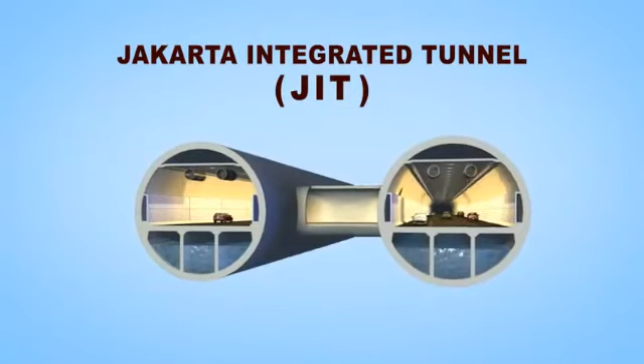Jakarta Integrated Tunnel, a twin or double-barrel tunneling system, presented by PT Antaredja Mulia Jaya and supported by the Ministry of Public Works and Housing in cooperation with the provincial government of DKI Jakarta.

Jakarta is the capital city of the Republic of Indonesia with a population of around 10.2 million people in 2011. But the Jakarta metropolitan area, or Jabodetabek, has around 28 million people, which is the biggest in Southeast Asia or the second biggest population in the world.

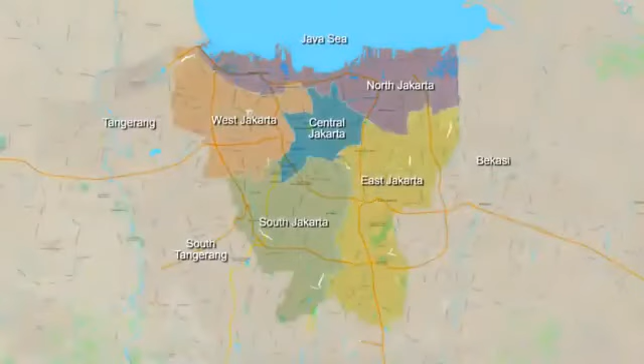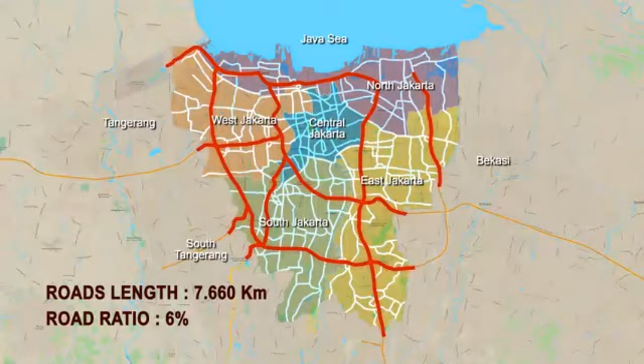Jakarta has only 7,660 kilometers length of roads, covering road areas of around 4,000 hectares. The ratio of roads in Jakarta is only around 6% of the city area. The total amount of motor vehicles in Jakarta was around 9.6 million in August 2014.

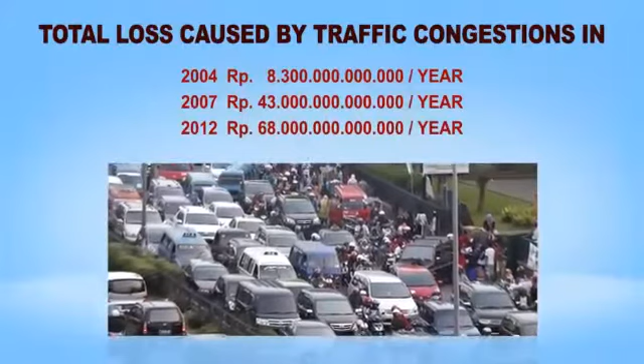These motor vehicles are always increasing rapidly year by year and cause severe traffic congestion in almost the entire city area. The classical problems of Jakarta city are traffic congestion and flooding.

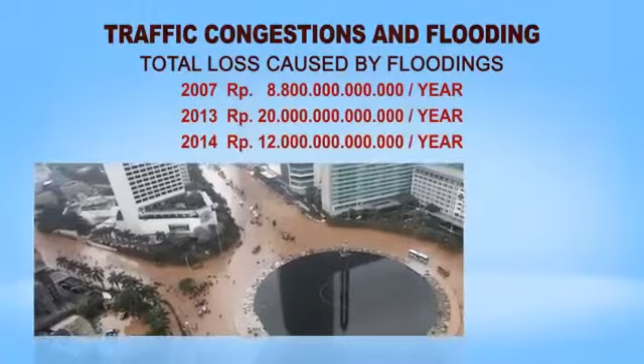The basic concept of flooding management in Jakarta was given by Professor Herman van Breen in 1918 when Jakarta was called Batavia under the Dutch colony. In this concept, Batavia city was entrenched by a flooding channel.

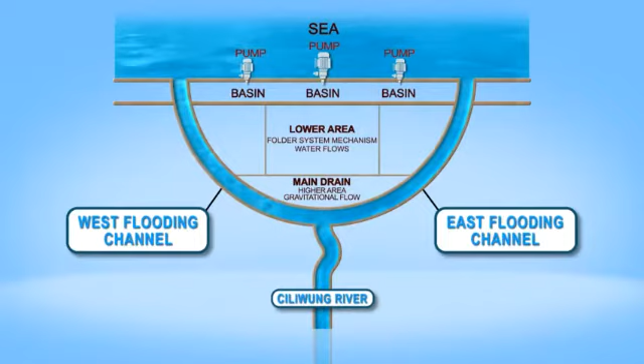In principle, this concept is to limit or restrict rainfall water coming to the city from the upstream area by building a half-circular flooding channel. Whereas since the volume of rainfall in the city has become less, it can be managed by building several drainage channels inside the city.

The Dutch built half of the flooding channel to cover surface water flow from the southwest area of the city. This channel is well known as Kanal Banjir Barat or West Flooding Channel. Just a few years ago, the provincial government of DKI Jakarta completed this flooding channel by building the other half of the channel in the east direction, that is the East Flooding Channel.

However, now a new problem has arisen. The old Batavia has changed and become a bigger city called Jakarta. The flooding channel is not bounding around the city anymore, but is now located in the middle of the city. Therefore, a new model of flooding mitigation is urgently needed at the south of this flooding channel.

The best answer to all of those problems is the Jakarta Integrated Tunnel, or JIT. JIT is a solution to traffic congestion and flooding problems, and at the same time, it can give a solution to the lack of electricity and standard clean water supplies of the city as well.

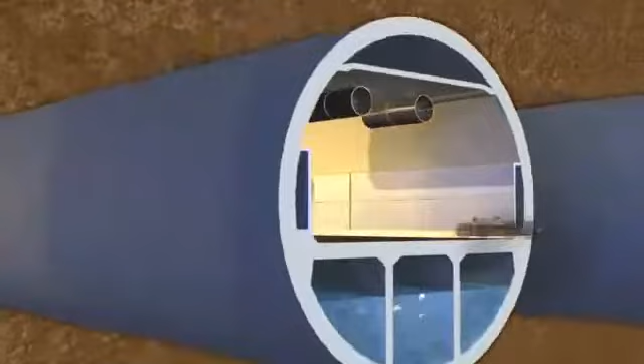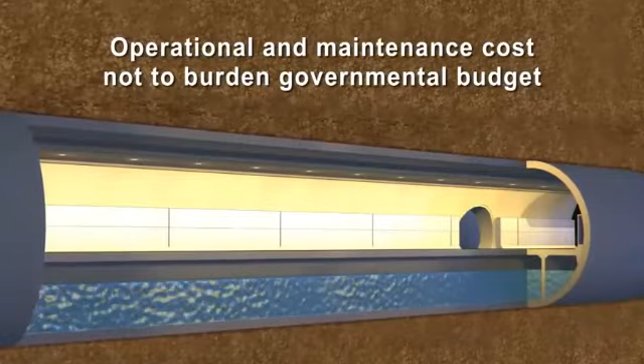Actually, it is an obligation for all governments in the world to build and finance flood controlling facilities, because not even a single private company will step into such a zero return project. In order to overcome this constraint, in the Jakarta Integrated Tunnel concept the flood controlling system is integrated into a toll road system. So, the JIT system relatively will not burden the government budget, especially in operation and maintenance of the project.

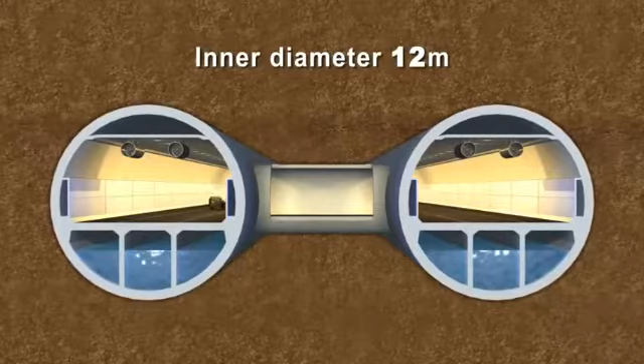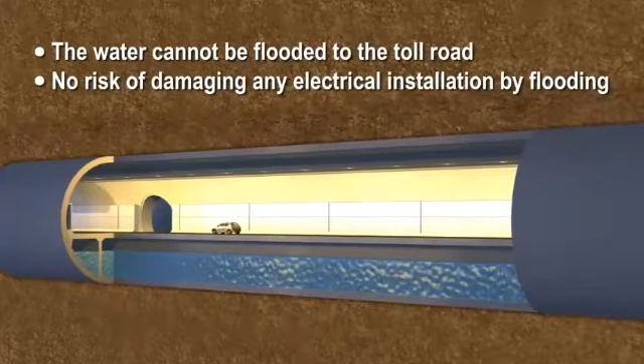Jakarta Integrated Tunnel System is a twin tunnel or double-barrel system of 12 meters inner diameter each. There are 3 lanes of toll roads in each tunnel. In the JIT system, the functions of flood controlling and toll road are totally separated. There is no need to build a water gate inside the tunnel to separate and alternate these two functions, wet and dry condition, as needed in the single tunnel system. Therefore, there is no risk of water flooding the toll road at all.

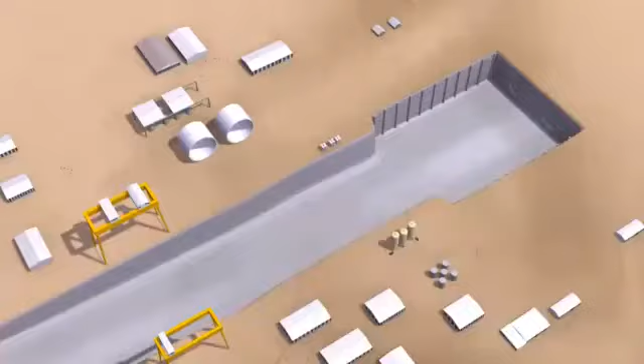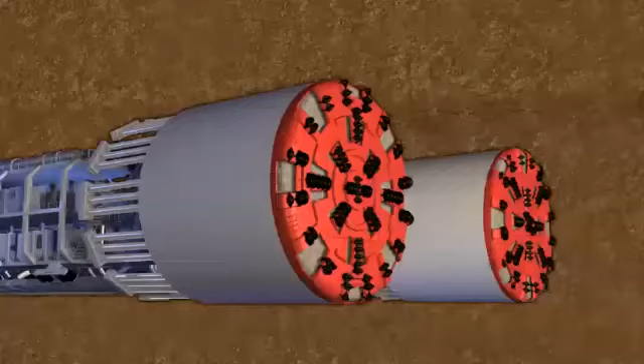Since there is no land acquisition needed, or only limited at both ends of the tunnel, tunnel construction can be done in a very fast and safe way using a tunnel boring machine or TBM. While the machine is moving ahead, it is followed by installing precast concrete segments to form the tunnel linings or tunnel walls.

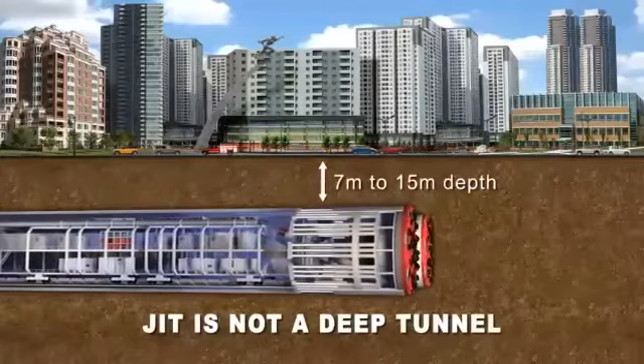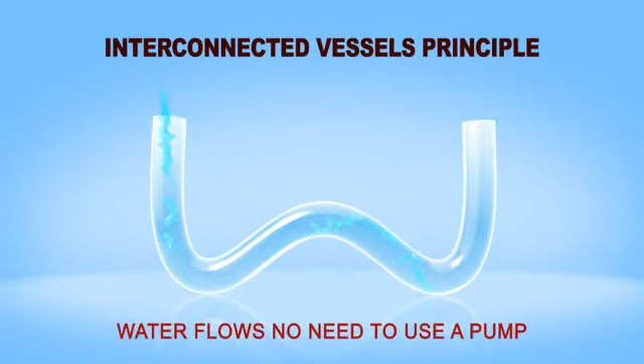The route of Jakarta Integrated Tunnel is chosen under an existing road or under an existing railroad. By doing this, it can assure to avoid long and deep pile foundation of buildings and to get a good compact subgrade formation. During construction stage of TBM, there is no or only limited disturbance to the existing activities on the surface.

So, if water is being poured into one vessel of an interconnected vessel, then the water will flow through the tube into another vessel until the height of the water level in both vessels becomes horizontally even. Water flows inside the tunnel is ruled by a gravitational law, and therefore, there is no need to use a pump, except for the purpose to re-empty the vessels.

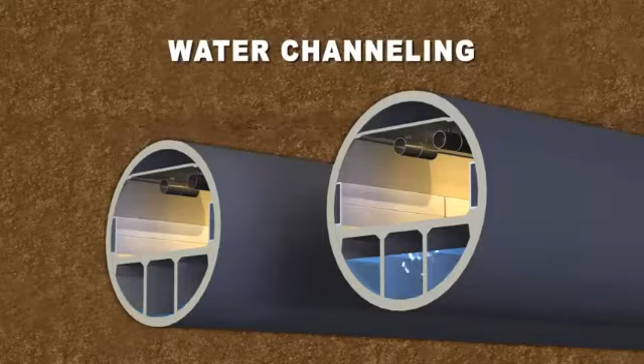Maintenance of wet area of lower channel can be done one by one alternately among each tube of the twin tunnels. When one tube is being emptied, then the other tube is still keeping on function in channeling water. With the continuous functioning of water channeling, the JIT system can also be utilized to build a micro hydroelectrical power system and as a water channel to cater for standard clean water supply to the city.

At the first stage, Jakarta Integrated Tunnel will build JIT-1, Balekambang Manggarai Corridor, with a total length of 12 kilometers. This tunnel is to mitigate flooding caused by overflow of Ciliwung River and to reduce traffic congestion at southbound to city center corridor through Pasar Minggu Casablanca toll road section of 9.60 kilometers length.

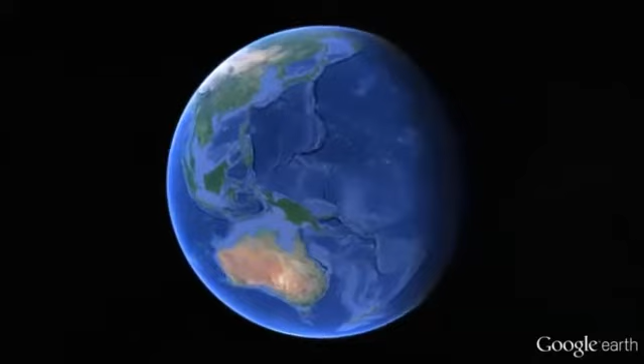This tunnel is stretched under the ground just right below the existing road, which starts from Pasar Minggu at Pasar Minggu Street and goes to Pancoran Junction, Dr. Supomo, and Dr. Saharjo Streets at Tebet area, up to the end in Manggarai at West Flooding Channel.

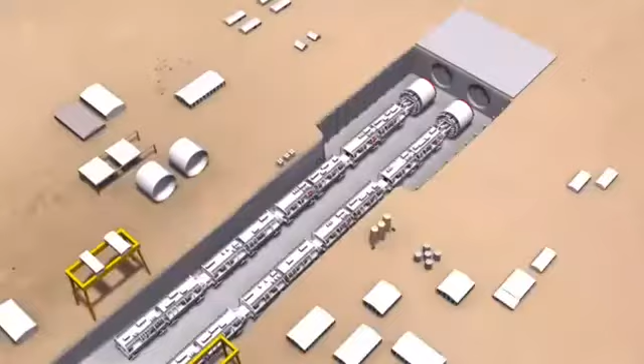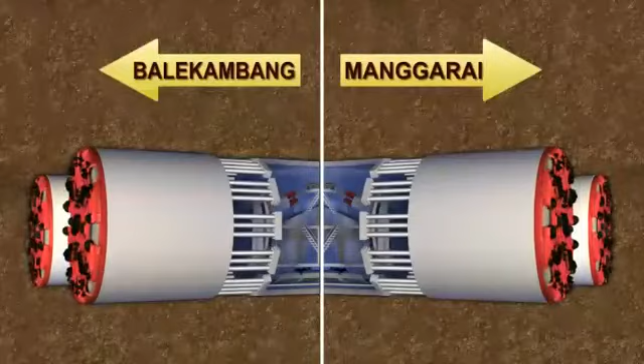In order to shorten the construction period, method of boring can be done in two opposite directions simultaneously. Starting from the middle of the route at Pancoran junction, two pair sets of boring machine can do these jobs by boring two directions of Manggarai and two directions of Balekambang at the same time. Schematic Jakarta Integrated Tunnel System for Corridor of Balekambang Manggarai.

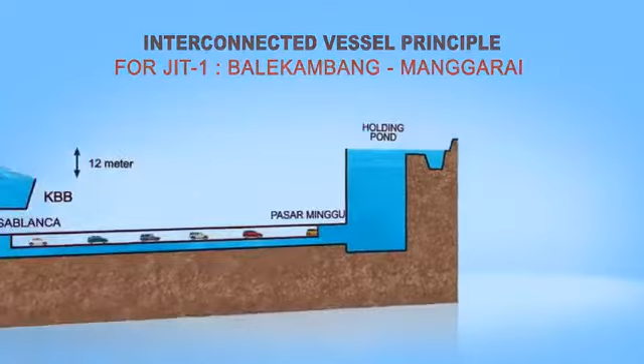After completion of construction JIT-1 Balekambang Manggarai, the problem of flooding caused by overflow of Ciliwung river, such as at the areas of Balekambang, Kampung Pulo, Kampung Melayu, Kalibata, Bukit Duri, Otista, Dewi Sartika, and Jatinegara will be overcome.

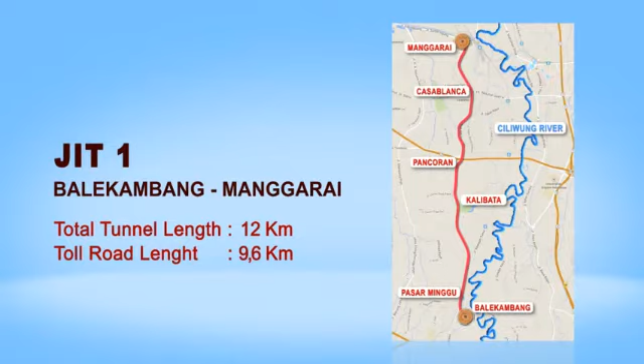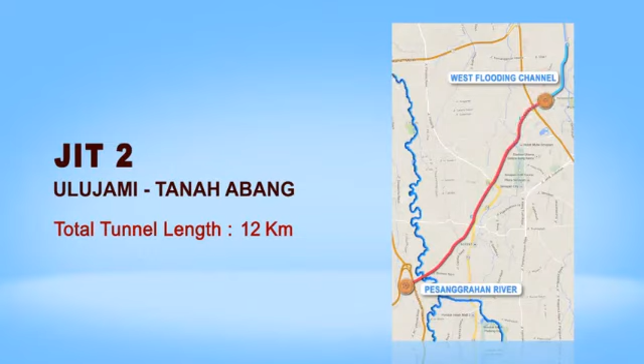Besides JIT-1 Balekambang Manggarai, with the same method at this first stage will also be built JIT-2 Ulujami Tanah Abang Corridor of the total length 12 kilometers. This tunnel is to mitigate flooding caused by overflow of Pesanggrahan River and to reduce traffic congestion at southwest to city center corridor through Ulujami Tanah Abang toll road section of 8.30 kilometers length. The 6th toll road section in Jakarta City.

At the first stage, 2 of the 6 sections of toll roads in Jakarta City will become 2 main JIT sections. Firstly, toll road section number 6, Pasar Minggu Casablanca as JIT-1, and secondly, toll road section number 4, Ulujami Tanah Abang as JIT-2.

In the next stage, it is strongly recommended that all of these toll roads become JIT tunnels in order to complete the basic concept of flooding management in Jakarta, which has been introduced by Professor Herman van Breen, so that all of other local flooding spots can also be overcome by these huge JIT drainage channels.

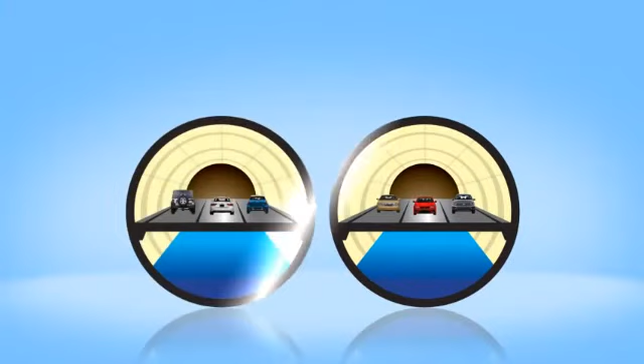The Jakarta Integrated Tunnel or JIT is a giant leap and gateway towards a better and a new Jakarta. But of course, it is not only applicable to Jakarta. It will also become a solution to all metropolitan cities all over the world. So, JIT is just in time.